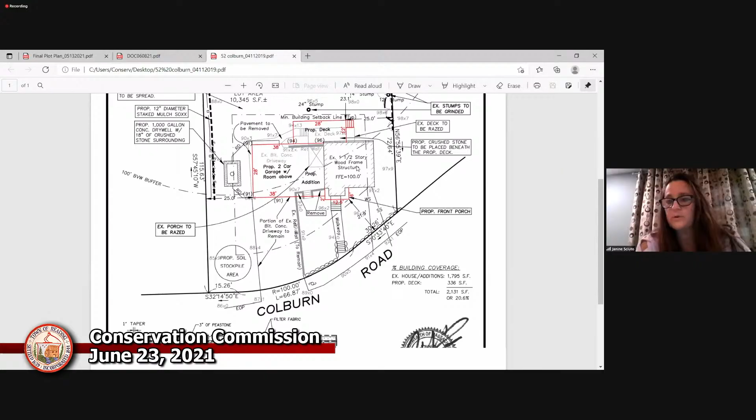So we had a fire damaged area of our home, and currently I think it's 12 by 14, and it has to be replaced because of the damage. So we are trying to just add a little 4 feet extra. It's like 16 by 18 now, and then the adjacent deck is also going a little bit bigger as well. We're just moving it all down a little bit. We put together the plan, which you had, and we discussed it last meeting, I think it was on May 26.

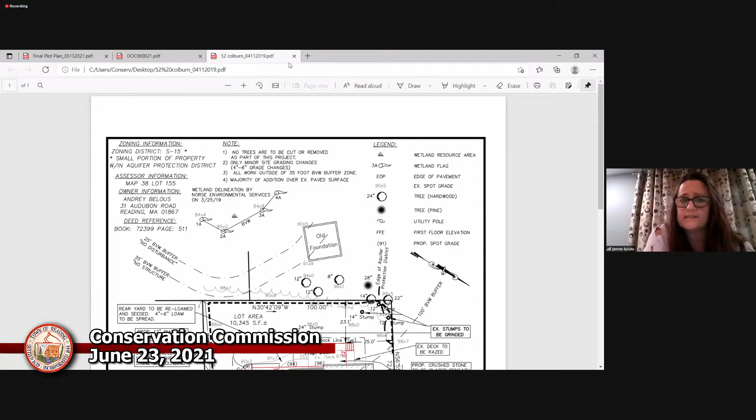And the thing was the question. I had my excavator help me with this, and he's going to put in the drip trench. That was one of the questions, where we were going to put the drip trench. So he helped me, and we were going to do the drip trench along all the areas that would be the runoff. And I still wanted to use my rain barrels, of course. So I put the rain barrels on the side of the house over there.

And there were a couple of other questions about how we were going to access. So I put the access area through our driveway so we wouldn't wreck our lawn. And the soil holding area is far enough away on the other side near the fence, and it's a flat ground area. It's just a soil holding area until we can get the excavator to remove all that soil after they backfill. Okay, thank you.

I'll open up to the commission. Annika, did you have any questions? I do, thank you. So the way I understand the figure, I just want to make sure I understand it. You're proposing a 2 foot wide by 2 foot deep, 1 1/2 inch washed stone drip trench lined with filter fabric in the areas shown in black.

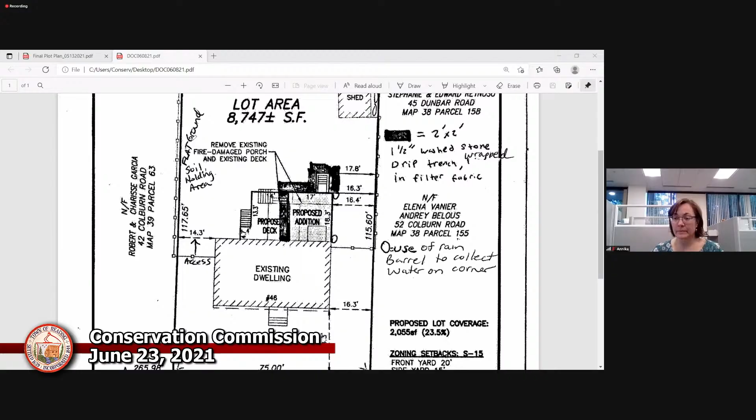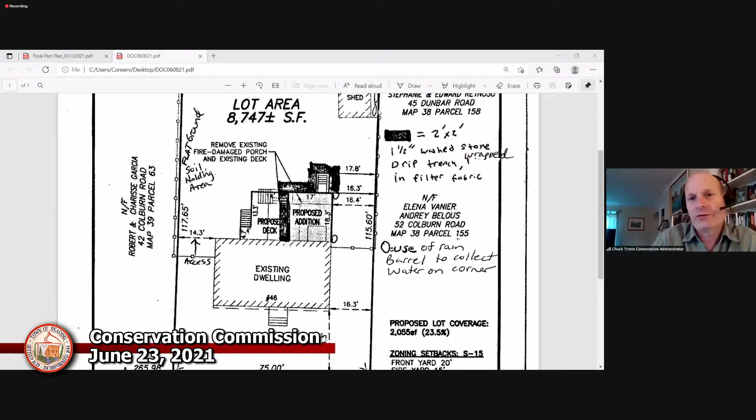A quick question, and I don't know if it's shown there. Where is the resource area? I think it said the nearest corner is 50 feet away from the fence. Is it shown on this plan? I've got the other plan up too. Yes. So the resource area is at the edge of the property line in this corner here. And this is like 70 feet. I think we had the other plan up at the last meeting. It says it's 49 feet to the fence from the proposed addition.

Well, I think that's from the shed to the fence. And then it says wetlands 2 feet plus to 4 feet further beyond the fence. Yeah, that's where the actual forest area starts. But someone said the first tagged tree was like 32 feet out.

Can't get rid of Megan.

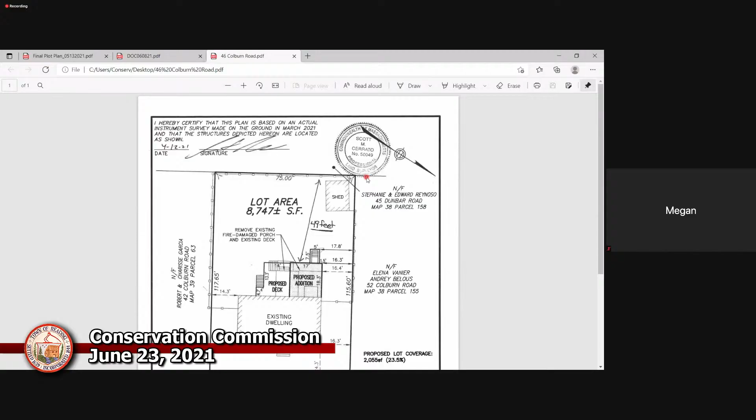Okay. All right. I don't have any other questions. I'm just trying to make sure I had my bearings for where this was. John, do you have any questions? Yes, I have a quick question. If we could go back to those stairs going down from the yard into the basement. There's a flat area at the bottom of the stairs leading into that door. Will there be a drain there? Yeah, there's going to be some crushed stone and some type of drain area, because that was our concern as well. Our builder says there's going to be a little drain area into the crushed stone underneath. Okay.

I think, other than that, Annika covered most of what I was gonna ask. And Martha, do you have anything? I'm just looking at the silt socks around the back corner near the wetland. I think that's probably adequate, but I'm a little worried about the soil holding area and whether maybe there should be silt socks around the pile of soil if it's going to be there any length of time. So that would be my only concern, controlling erosion from the soil holding area.

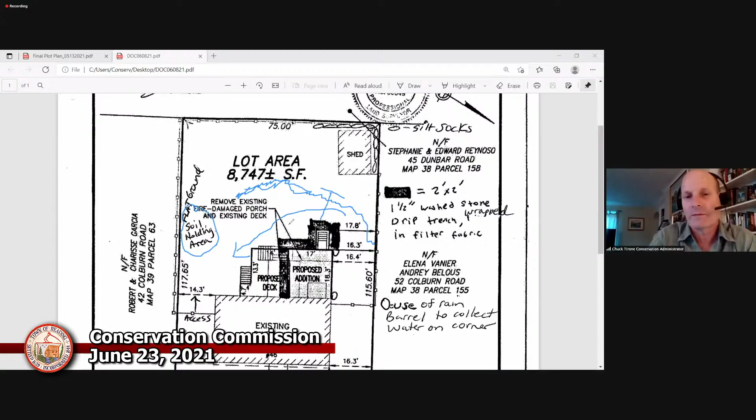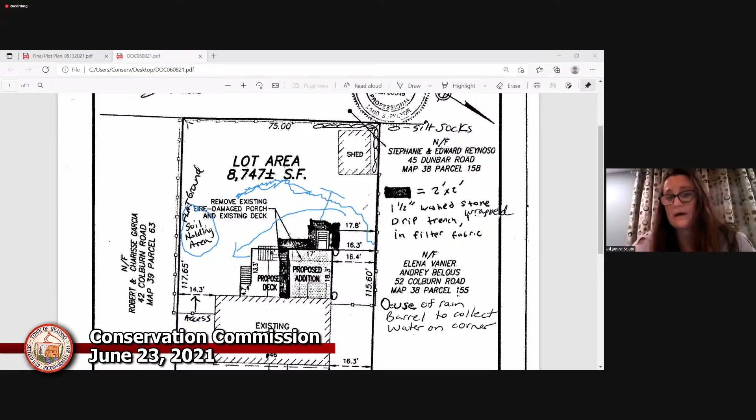The other thing I wanted to ask, someone brought this up before, is about the grading and regrading. Do you have any intention of bringing up the existing grade? Are there any low spots? Does the rainwater collect somewhere that you're trying to eliminate with some of this backfill dirt you're pulling out of the hole? We're going to backfill as much as we need to and probably grade away from the project area. There really aren't many low spots. It's pretty flat ground. But definitely we would grade it down away from the area, like we've done our entire house.

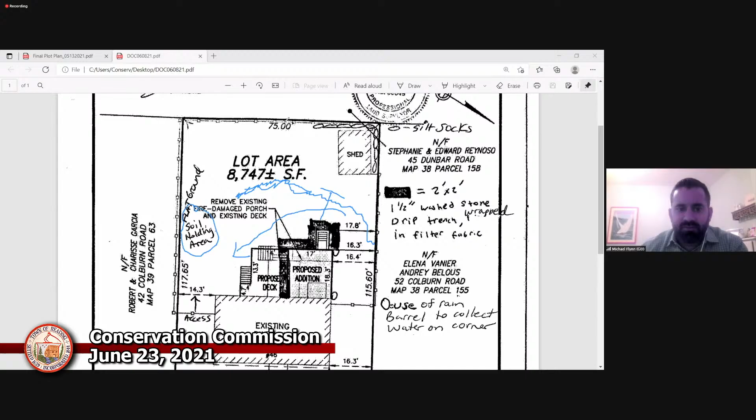Chuck, I'm going to do a little hijack here. Martha had taken a great picture. Yeah, I was just trying to figure out how far back this grading is going to work, and then explain that when you put in the erosion control, it's also the limit of work. So we would need to know where that's going, and you couldn't grade behind it. And you certainly couldn't grade within the 35 or the 25 foot. I think that's going to be somewhere in front of the shed.

So I'll ask for just the email telling me about maintenance and how you're going to wrap the stone, and then draw on the plan where you're going to put the erosion control, and show the erosion control around the stockpile area. But give me a number between the addition and the erosion control so I know how far that is. By number, Chuck, you mean a distance? A distance. How many feet from the house to the erosion control. And then at the office, we can find out if that's within the 35 or 25 foot area.

That's all I have. Okay. If I can just jump in for a second, I just want to comment. What's the reason for this? I mean, this is not pointing fingers at anybody or anything like that. It's just an open question. But what's the reason for this being filed as an RDA as opposed to an NOI? What's the thought? Is it that it's in that outer between 50 and 100 feet?

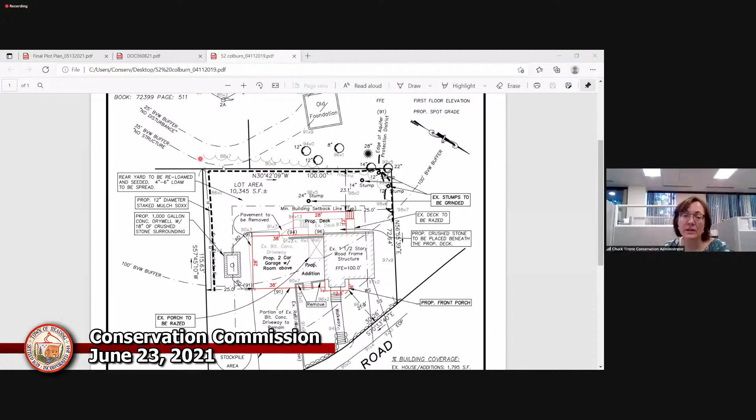On the screen, I hope you can see it, is the neighbors. That corner shows the 35-foot line, and this was professional delineation. So the 49 feet plus the 35 is where we're at with this project. So where it says rear yard, I'll just show you. Right here is the current proponent's corner of their house. And that's the shed in the back there. 35-foot line right here. Okay, so the shed's in that back corner. That's right, the shed's right here. Okay, so I wrote down 49, but it's 49 plus 35. So that's all I wanted to make clear.

May I ask a question? Sorry. Yes, go ahead. So if my land is totally flat and the grading really isn't necessary, what am I exactly grading? Because it's a flat piece of land. So I think that was the question to you, we wanted to make sure that there isn't significant grading going on. Oh, yeah. I'm just gonna reseed. There's really nothing to do because it's flat. Good. Okay. That's what we want to make sure. Oh, okay, thank you.

All right. Are there any other items from the commission? Any comments from the public? You can use the raise your hand feature. We'll unmute you.

Not seeing any. I don't see any either. All right. Do I hear a motion? Make a motion to issue a negative determination for 46 Colburn Road. Do I hear a second? I second. Michael Flynn in favor. Scanlon in favor. Martha Moore in favor. John Sullivan in favor. All right.

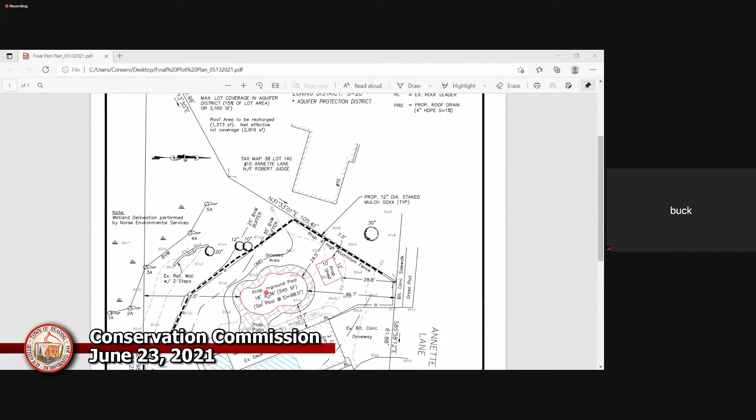Okay, I don't have a problem putting plants back there if that's the issue. There are plants there. I believe the previous owners had taken the trees down and they had to plant these plants in place of those trees, right at the left edge of the retaining wall and to the left. I believe there's 3 of them. But I can plant more. Just let me know what to plant.

I don't think we need a forest, but I think it would be beneficial to the wetlands habitat, now that it's got a little bit of restriction from that fencing and the development. It just makes sense to enhance some of the buffer.

Yeah. I think what I would suggest, Annika, is that if that's the case, then there should be a site visit to make sure we understand that option, because I'm maybe the same way as Chuck. I'm a little confused at what could be put back there. Is there actually room? I've kind of lost my sense of space of what I saw when I drove by there. I agree. I was actually thinking that retaining wall was set back and there wasn't space. I thought the mulch sock was essentially on the limit of lawn.

And it's transitioned to like a dirt vegetated cover beyond that, but maybe I misread that. So I guess what I'm saying is I don't know that there's space to plant. I think it's relatively well vegetated, but if there's a gap that you feel should be filled in to help limit, then I do suggest that we do that with a site visit.

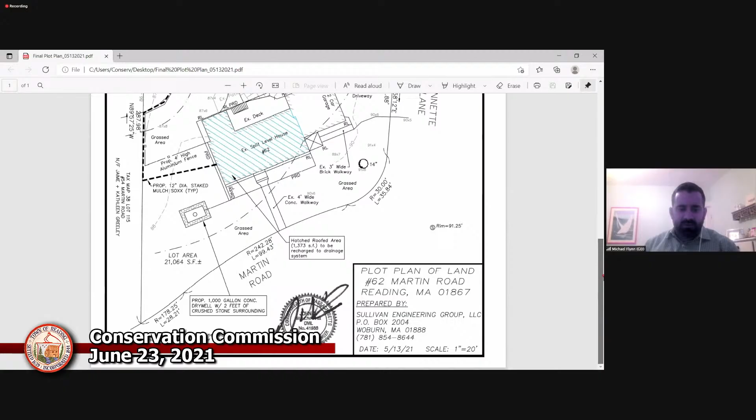Where does it say that, Jack? It's towards the bottom of the plan. Can you go up, Chuck? Yep, right, nope, other way. I saw it. That's okay, I sent you the wrong way. So at the bottom of the plan, I said, note a soil test hole is needed to determine soil type and groundwater table data. Right below the dry well note, if you see proposed 1,000 gallon concrete. I know it's there.

Okay. But you got an elevation 91 over here. Is that, and I'm assuming 88 in this area? Does that dry well work on that corner and you get your 2 feet? I only did that because, and I probably should have showed it, their water and sewer services are coming in front of the house, and we had that 14-inch tree with the root, so I tried to keep it away. But if I had to relocate the dry well, that would be a spot I could look at to gain some elevation.

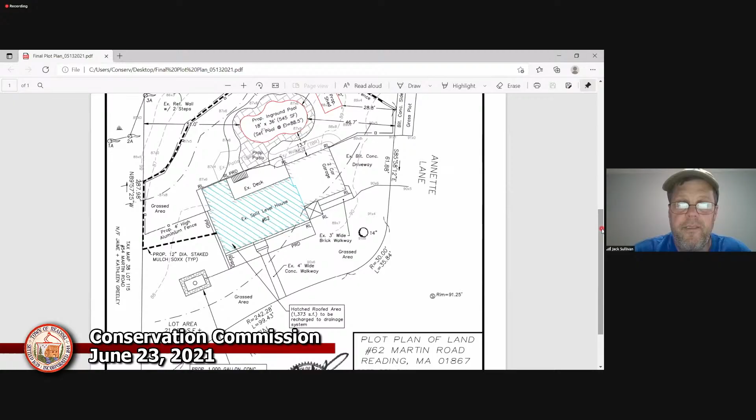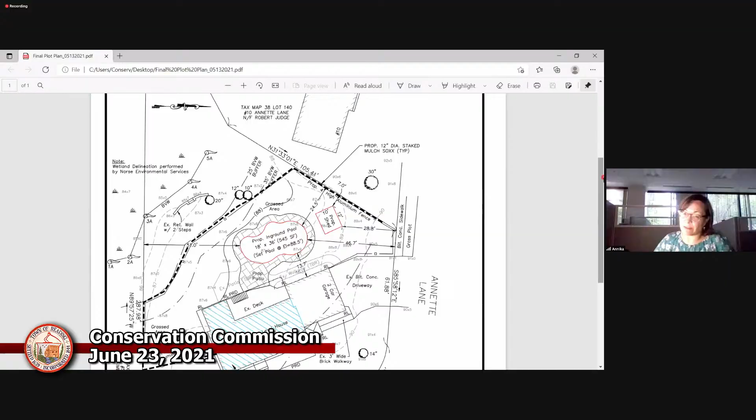Quick question, sort of related. Have you ever had to use the Frimpter method to estimate the high water table? I have. I had a question about that. Doesn't pertain to this. I've had to use it twice, but yeah, call me offline. I can talk with you about it.

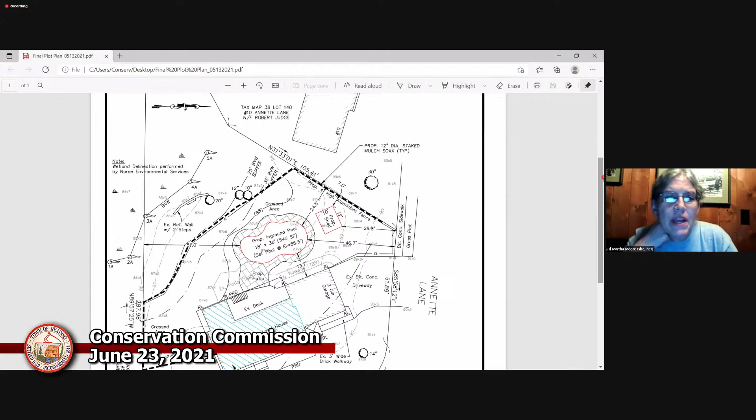Any other questions from the commission? I just have one water table question. You were saying the deep end of the pool is about 6 feet and the water table is like 3 feet below ground level. So you're gonna need to do some dewatering when you're digging that deep end of the pool. And I'm thinking about the instructions to the last homeowner on where to dump the water when they're pumping it out of the hole. Have you got a plan for that?

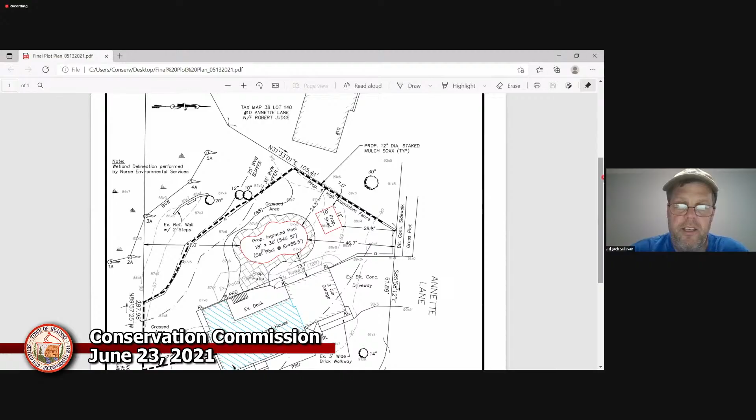That's a good point. We'll have to set up an area off the driveway, probably between the driveway and the shed. And we'll set up some sort of hay bale enclosure where they could pump to that area and then let the water discharge and go over the lawn like you talked about in the previous hearing. So if there was any silt, it would be collected before it went out into the lawn area. And that was all. Okay.

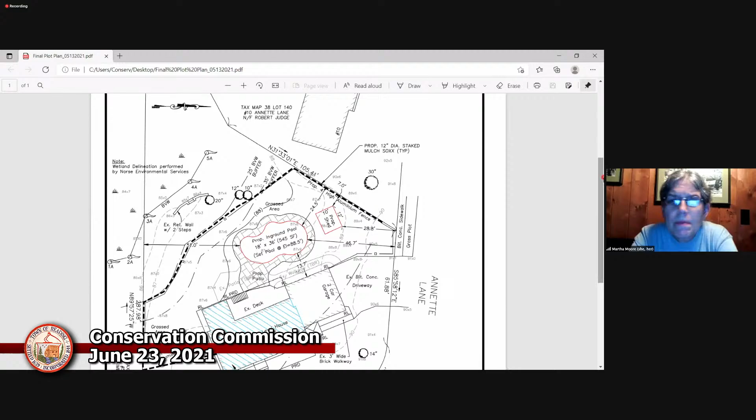Any other items? Any items from the public? Can you use your raise your hand feature? Seeing none. If you feel like you had a comment and you didn't have a chance to get it, you can always email the Conservation Division through the Conservation Division webpage at the Reading Town website.

All right, so let me try to wrap this up of where I think we're at, and you guys can tell me if I'm wrong. So I think, Annika, it sounds like there's some concurrence that if there's some plantings that can be done within the 25-foot zone, it'd be a good idea to create a little bit better buffer since we're putting so much into that zone. The best way to do that would be through a site visit between now and the next meeting. Do we have any other items for Jack to come back and identify on the plans that we think needs to be shown or changed?

No, I would just ask Jack, maybe in the future it would be beneficial to the commission to understand where things are located. If that edge of tree, I'm going to call it the tree row, is located on the plan. Yeah. I think that would have been, and I know that it says grass in one spot, but then it doesn't say anything below the erosion control line. Yeah, it's just tough to delineate where that transition happens.

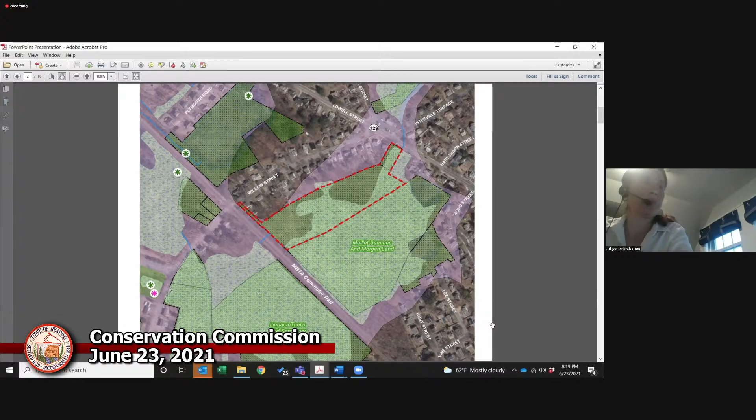The existing use is a conservation land with informal and formal pathways, permeable pathways, and a boardwalk that was, I believe, installed in 2019 or thereabouts over the existing bordering vegetated wetland. I'll note here that the wetland that's shown here is the GIS wetland, and we'll show on the plans coming up here where the delineated wetland is.

Just to give you a sense of our design approach or our goals for this project, as was mentioned in the intro, we are working with the Mystic River Watershed Association, the town of Reading, and other towns in the upper Mystic watershed to address some of the broader regional flooding and water quality issues in the upper Mystic and the Aberjona. And we are also looking to provide connectivity to larger open spaces.

So the goals of this project include managing stormwater to improve water quality and address flooding, restoring the existing landscape with native trees and plantings, enhancing the pathways that exist on this space, and allowing residents that are adjacent neighbors and other members of the town of Reading to enjoy the wetlands and the trees and habitat. And also to incorporate site amenities that will allow more people to connect to this open space, including some parking, improved entrances, signage, and seating.

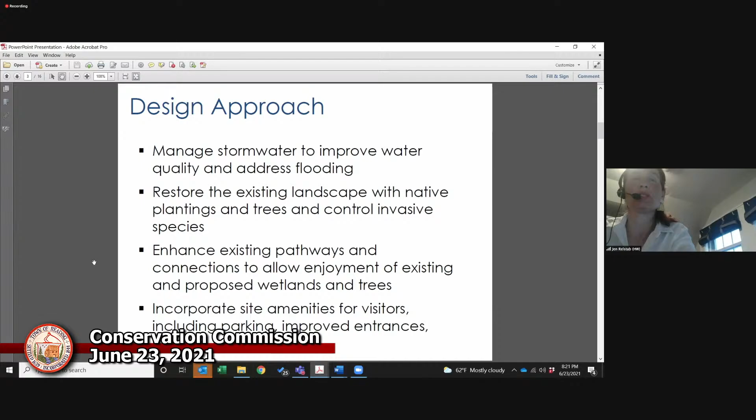The design elements that I'll talk about today are the stormwater management, the restoration opportunities, and the open space amenities. And these pictures on the right-hand side here just highlight some of the images of what we're trying to achieve at this space.

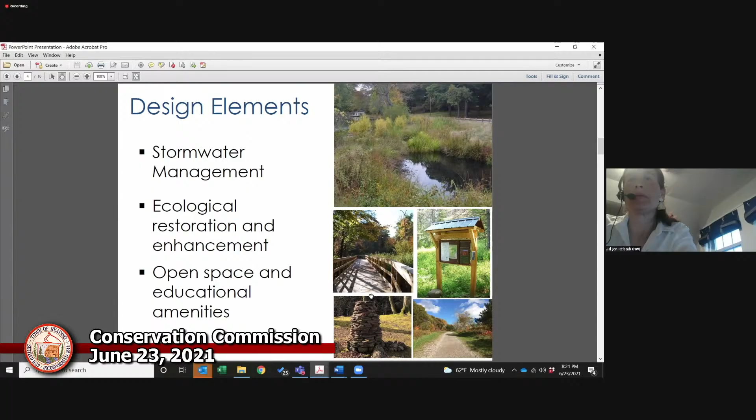So the stormwater improvements here: the existing stormwater that comes from Willow Street and Lowell Street, about 40 acres' worth, currently runs through drainage pipes directly into this culvert that is located on Lowell Street. And we're proposing to divert a portion of that stormwater into the Mallet Conservation Land. That would be treated first through a series of sediment forebays that provide pre-treatment, and then through a series of wetland pools. That's here in this image, these light green and blue areas.

These wetland pools provide varied topography and varied vegetation to provide not only filtration of the water, but also habitat for wildlife. In this particular design, because of the existing resource area on site, to connect our vegetated wetland cells we are piping underneath the existing bordering vegetated wetland in the area of the existing boardwalk to minimize the disturbance to that area.

Stormwater, as it continues to flow through these various pools, then goes back out to the Aberjona. And in this image, just for reference, the Aberjona is this light blue line that goes through and underneath the railroad. We also have some treatment of the parking and access lane that is on Willow Street, and I'll talk a little bit about that in the next slide.

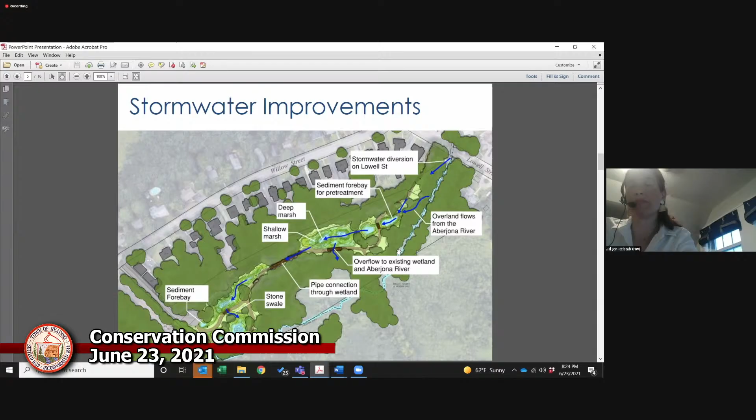Oh, and I should also mention that we are proposing a very small channel that will allow very large storms, so greater than 50-year storms, to flood into this space in conditions where it would normally flood over bank. We do not believe that this particular design would inhibit any of the current flows or uses of the Aberjona by wildlife or others as it is now.

The open space improvements, I'll sort of move left to right in this figure. We are improving the existing vehicular access to the space from Willow Street by widening slightly the existing path to allow for vehicles to come into the space and pass if needed. There's a little bit of a turnaround at the bottom and 4 parking spaces here.

We'd have an informal entrance and kiosks that would have both educational and wayfinding features with potential what we're calling rock cairn sort of entryway signs and elements. This path that you're seeing in sort of the light brown is a permeable pathway consisting of a stabilized stone dust that would have boardwalks crossing over areas where the water would be flowing out and into the existing wetland or the Aberjona.

And there's other features here too, including overlooks and on this side, stepping stones to allow people to interact with the constructed wetland. We have proposed benches, formal benches, and then also seating walls in certain locations to allow people to have passive recreation and view birds and sort of experience the wetland.

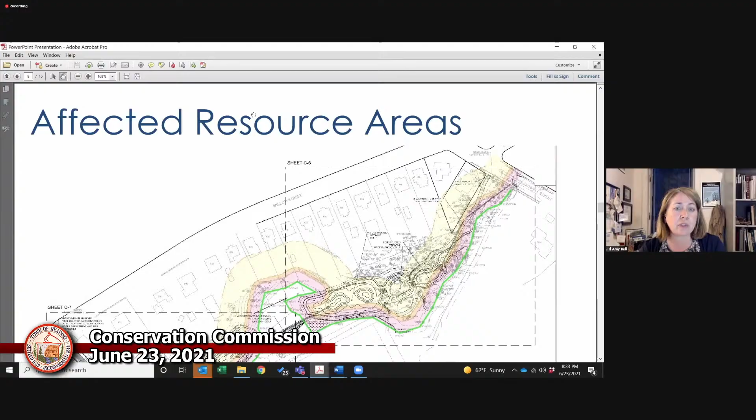So the proposal is to remove, restore and replant the area within the existing footprint of the walkway, and then to also provide some wetland replication for the additional alterations. The replication area is a total of about 1,500 square feet, and it's being designed to match the Massachusetts inland wetland replication guidelines. With that, I'm going to turn it back over to the commission for questions and discussion. Thank you.

Thank you, Jen and Amy. I'll turn it over to the commission for some questions. Before we talk about the specifics of the project, I had a couple of more administrative questions. This project is filed by the town of Reading. I think you had come before us in general to give us some feedback. Which watershed is it that's involved? It's the Mystic River watershed. Mystic, yeah. So what's the role that each group plays in this? This would be a town project, is that correct?

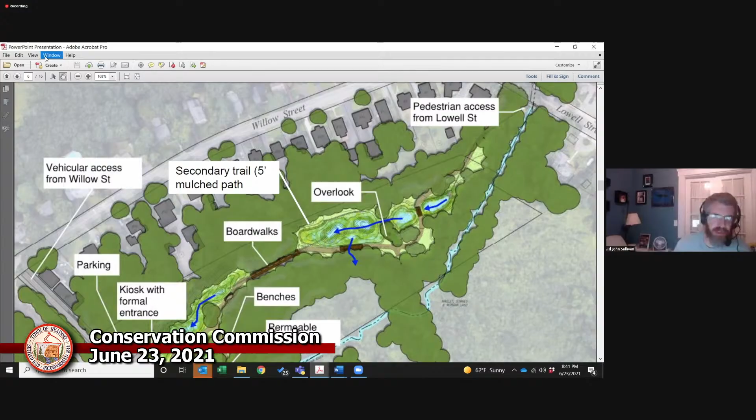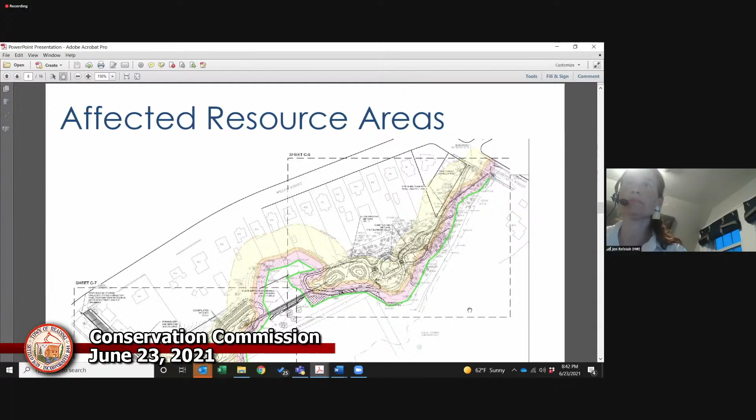Is that just because it's not on these maps because it's not where the work is being done? We didn't, yeah. So the original survey did not collect it, and we collected it when we were on site doing our field assessment. So it's not surveyed, it's just sort of identified, so to speak. But we have a call out there to connect to the existing path. Yeah.

Any other items, John? That's it for now. Okay. Martha? I have 2 questions. One is about the replacement trees.

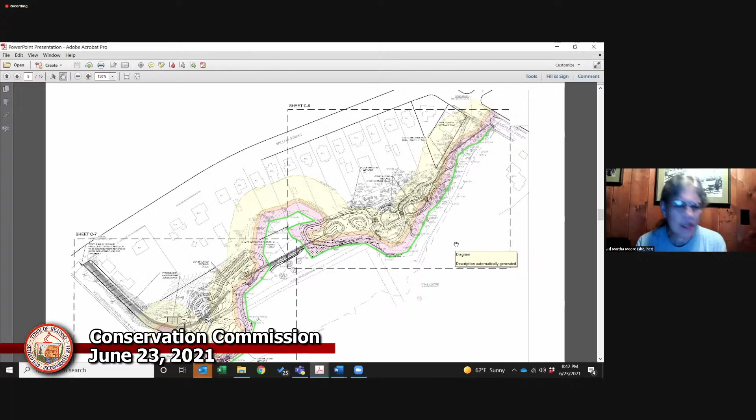I believe our tree policy calls for replacing trees with trees that are something like 2.5-inch caliper trees, and your 31 shade trees are listed as being 1 to 1.5-inch caliper. So I'm wondering whether that can be adjusted to match our tree policy size.

So I did check with our landscape architects about that. They can't really tell us when it comes to an 8 to 10 foot tree, which is what we have there, exactly what the caliper is. And they did say that planting slightly smaller trees may be more successful in the long run.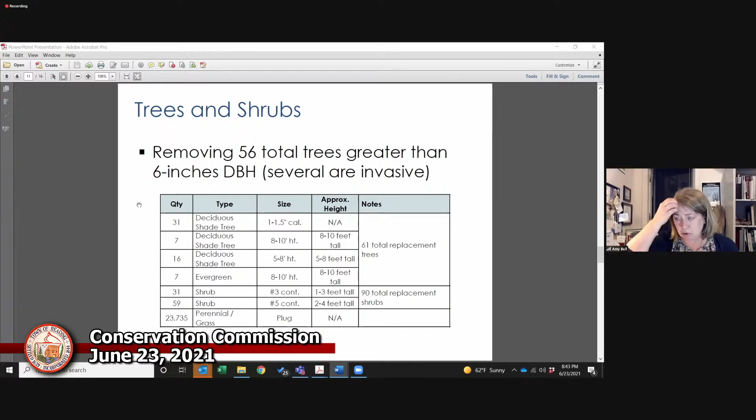And as I said, there isn't really a 1-to-1 or 2-to-1, 3-to-1 matchup perfectly with your tree policy. But we were trying to do the best we can with the site conditions and the goals of the project, being to ultimately manage the flooding and the stormwater that's in there. We can look at it and see what's available.

Okay. Yeah, I have no objections to the numbers that you're bringing in, because 2 shrubs equals a tree in the tree policy. So numbers, you're fine, but it might be that in a wooded area like this, you're better off with more small trees rather than, you know, in somebody's yard, they're putting in the 2.5-inch caliper trees. I just wanted to bring that up.

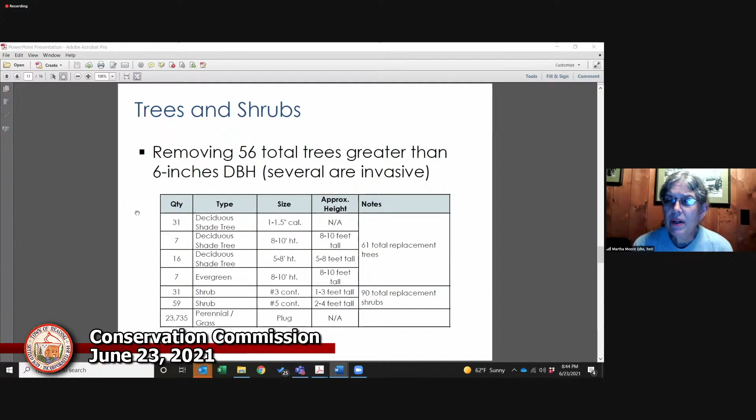No, I appreciate that. And then my other question, when I was reading the packet, you described the boardwalk that you were going to put in with wooden planks on the top. And I know a lot of the Eagle projects that have come before us have been using composite planks rather than wooden planks, and they're replacing the rotten wooden planks from previous iterations of boardwalks. So can you talk about why you chose wood versus composite for the boardwalks?

Yeah, so I think in the detail it's pressure treated wood, and I don't even think we specified what wood, but a lot of our projects we are trying to use hardwoods that would be sufficient for a natural condition. In a couple of our other projects in other communities, and this is part of a broader goal as well, we've been looking at using local wood sources, using black locust as an example.

That can be expensive, but it is a very hardy wood. And we'll have lots of it here. I was going to say, we do have lots of it here. If we could just meet up with a miller. Yeah, if you know a miller, that will be great.

But that tends to be our preference instead of composite, mostly for, first of all, the natural look and aesthetic of it, but also the long-term climate impacts of using a natural, native-ish hardwood. But if there's a particular interest in changing that material, we could have that conversation as well. Those were my only questions.

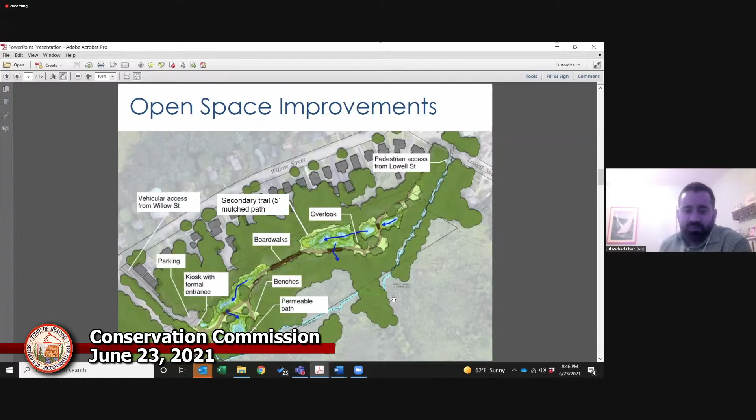Okay, thanks, Martha. All right, I'll start with the trees as well. I think you had some great plans showing the proposed plantings. Yeah, here we go, Chuck. So 56 trees is a lot. So I guess I'll take a step back.

I didn't go out to see the site. I know this area very well; we've been out there for other projects. But I think it would be good to get a site visit with the commission. What I don't have a great feel for is where exactly all these things go in space. It would be nice to just walk the site and understand where this is exactly proposed, so we've got a better feel for what is going where.

I know you guys are running out of time on your contract, so I think we have to schedule that sooner rather than later. I think we've proposed a few days, and we're going to be figuring that out as part of a later part of our agenda. But I would like to understand where this is in space and what's out there. Have the trees that are going to come down been marked at all?

No. Are they marked and X'd on these plans? Yes, if you go to the existing site demo or ESC sheet, which I think is the fourth sheet in the set, they're marked with an X.

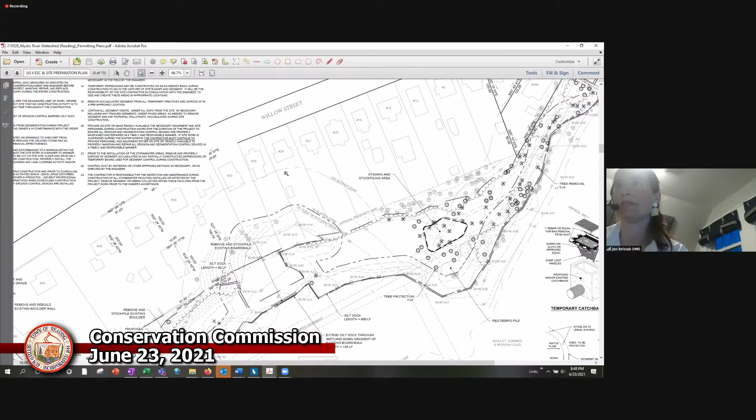I will pull that up if you want. Yeah, I will note, just as a caveat, and I can stop sharing so Amy can show that, but I think those don't have the species and size on them. I think that's true. One of the issues that we ran into, there was another surveyor who conducted the survey, and I think some of what we were seeing with the survey was slightly inconsistent with what we were seeing from our habitat and tree assessment. So that's why they're not shown on there. But as we walk the site, we can kind of walk through that with you.

Okay. Very good. And I mean, this is a big area, so 56 spreads out quite a bit. From a community standpoint and the neighboring houses, I am interested to understand where those are being pulled down and the relative replacements that are going back. The trees that we put back will hopefully eventually grow into something similar to what it looks like today. But I do in general have concerns about taking out so many and having this feel open, and the neighborhood along Willow Street feeling like all of a sudden everything's clear cut back there and they're just looking back into this.

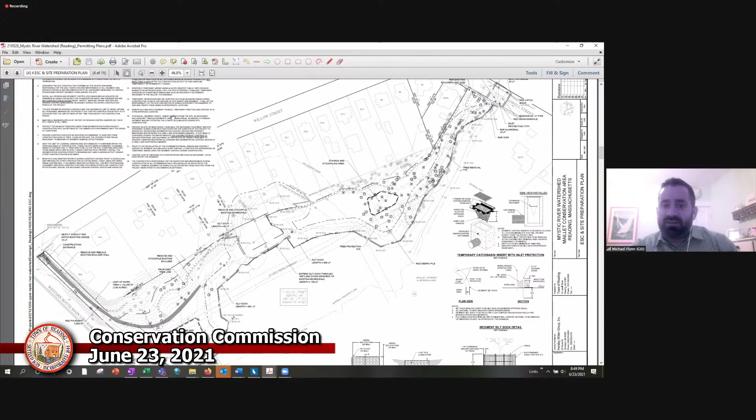I think I saw with your replanting, there was a lot on the line between, essentially. Jen, I'll stop sharing. You can go back to that plan. Okay. There were a lot of proposed plantings in that line between the homes and where the treatment is proposed to take place, which I like. Usually we try to push it closer to the wetlands and create that buffer, but this project is different from most of what we're seeing and is getting incorporated into the habitat.

So I like the idea of having that buffer exist, I guess I'll call it west of where a lot of our resources are, to enclose the space, make the community feel like they're not walking right in back of the neighborhoods, and the homes back there not feel like we've just clear cut everything and they're opened up and looking at it. I think that's an important feel to any sort of replacement plan. That's part of my goals when we look at what trees are being taken down. How does that look and where are the replacements relative to that?

I'll speak to two items and then Amy, you can feel free to talk as well. The majority of the trees being taken down are on Amy's plan, but we won't switch back. We have that connection from Lowell Street coming through, and that pipe that is going to come through and connect to the sediment forebay, and also the improvements we're making to the existing footpath that connects to Lowell Street. The majority of the trees being taken down are on the interior, sort of the middle of the space here on the east side.

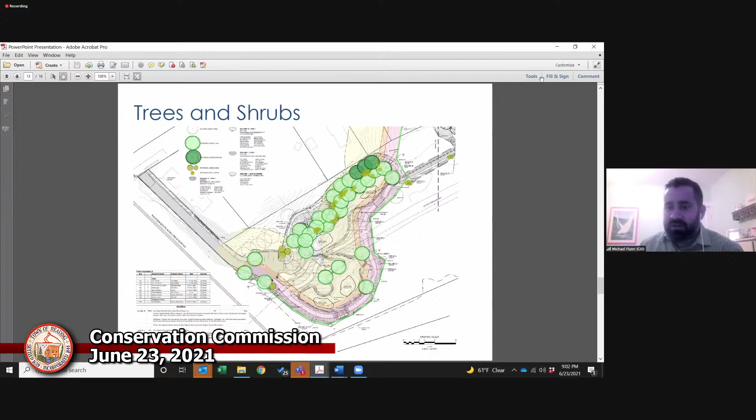Hi, I'm just going to jump in. Yeah, go ahead.

Just looking at the plans and listening to this discussion, I just wanted to mention the area where the 100-foot buffer meets that road, that access road. I'm hoping to see that a little bit more clearly, and what trees are also in that area that might be coming out. So that's one thing that just sort of popped up during the discussion tonight.

The second thing that came up for me was appreciating the restricted access, even if you are expanding the width of that entrance road. One thought or idea I had was, is there any opportunity next to that access road to have like a crushed stone path as well, to increase walkability from the street next to the road?

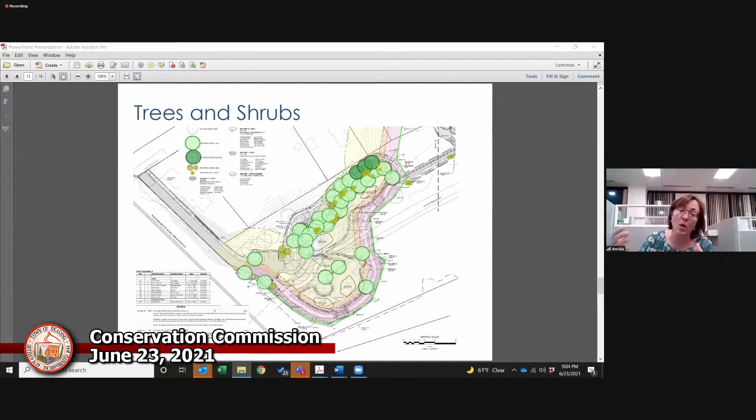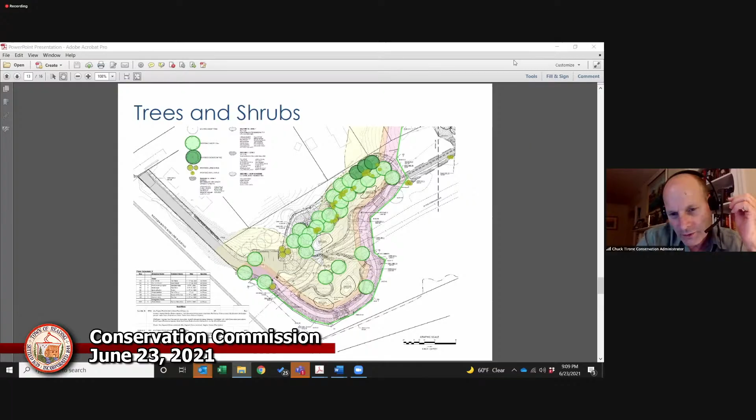Well, just had a, sorry, some of the changes to the plans. One of the ones I was thinking about was some sort of lookout area. I think I mentioned it in one of our meetings. So if there are some additions to the plans, is there an opportunity to change these moving forward if there were some changes in the path or some additions that we'd want to do?

I guess that could also be something that the town takes on outside of what's here. It's just that you're going to walk this path around the outside that's kind of along the Aberjona River, and there's one point where you could really take a good look, looking towards the depot with the train tracks on your right-hand side, and look at the Thalen Bird Sanctuary in that area. And I thought that was an interesting area just to drop a few large stones in, of course not in the water, but just for a lookout area.

Yeah, I mean, we'd be happy. I think it would be good, to Michael's point about a site walk, to point those out too and have that discussion. We obviously have, for this particular cycle, about a week left. So it's a limited time for us, but we'd be happy to look at that on site.

It almost seems inconceivable that you would find a couple of boulders with this project. But no, we actually were removing, well, I think there's like 5 or 6 that were to come out because of the grading back in this spot here. There's a few that are kind of sticking out here that we need to remove because of the grading up in this space. So we will have some boulders conveniently.

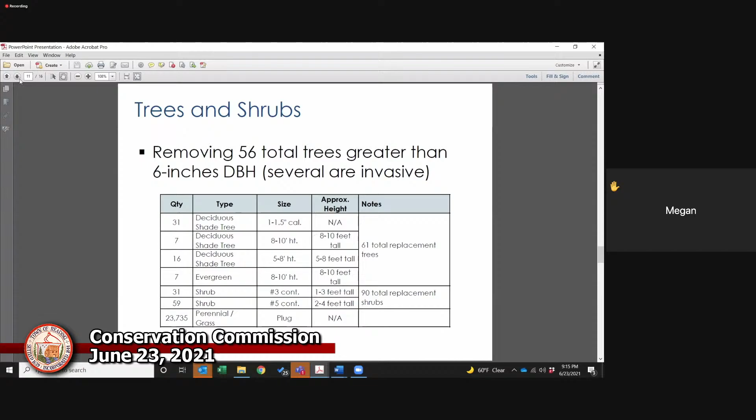And also commenting on the road coming in, many times that I've driven down there with boardwalk materials, even after much of it was done, I never encountered anyone walking on that road. I never encountered a car coming down. So I don't see needing that extra space as an issue. I think people can walk on the roadway safely.

They started using it after you built the boardwalk, Will. You created that space. Yeah, right.

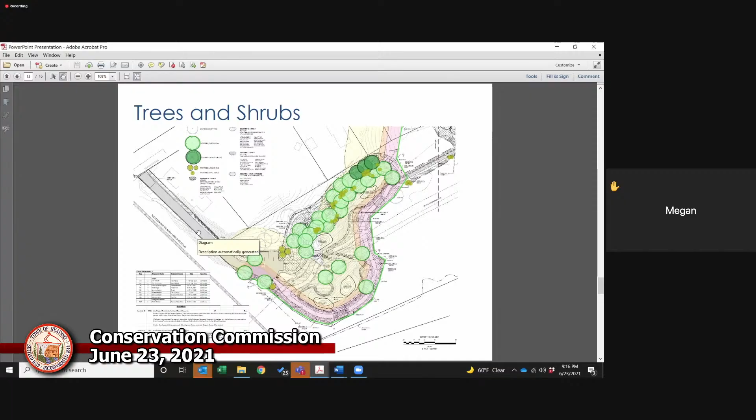So those are all my comments for now. Thank you. Anyways, this is Will Finch. I live at 51 Mill Street in Reading. Thank you, Will. Good comments.

I guess the one that I am interested in hearing is, do you have any thoughts on the invasives? Well, actually both that I thought were really good points. I'd like to hear a little bit more of the invasives and the 8-foot wide paths. I actually don't think I caught on the 8-foot wide. So tackle the invasives if you get the path, okay, Jen?

Yep. So the invasives, we're all pretty familiar with. Japanese knotweed, unfortunately, and the approach that we've got is not completely fleshed out, but it is a combination of mechanical and herbicide application. A good portion of that is occupying that field. When we first did our site visits, I didn't think anything of it, except there were sort of these strange, mounded, oddly textured areas in the field. And then we were back a couple of weeks later, and you realize the whole field is filled with it.

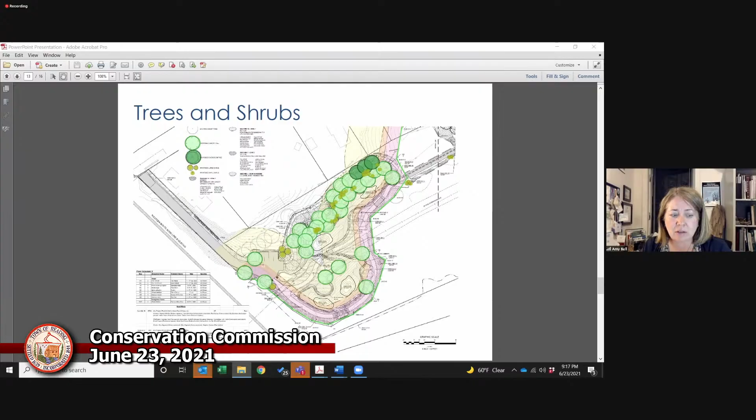And that's one of the areas where we're going to be doing quite a bit of excavating for the deep pools and for the constructed wetland. So some of that excavation will occur. But I think what we found in our experience is that the combination of both mechanical removal and the herbicide application is necessary to really beat this back, so that mechanical in the long run can be done with some regular diligence, I suppose, catching them early.

The path, yeah. So we actually had it a little bit wider than 8 feet. In one of the earlier concepts, we had talked with Alex and Chuck and others, and one of the uses that we were hearing that the town would like to have is the ability to have both pedestrians, and that includes walkers and strollers, but also people with bikes, so regular bikes but also mountain bikes, be able to use the space. And so multi-use paths actually require a 10-foot wide path, so 5 feet for each direction, with clearance in the shoulders.

We tightened that up a little bit, acknowledging that the existing paths that are out there are about 5 feet, and there are several informal paths that are even smaller than that. And the intent of this space is obviously first and foremost a conservation area. And so we are trying to manage that to the extent possible by limiting that. However, we do acknowledge two things. One is that more people will likely use the space once it is improved, as was just mentioned. Once you build it, they will come sort of situation.

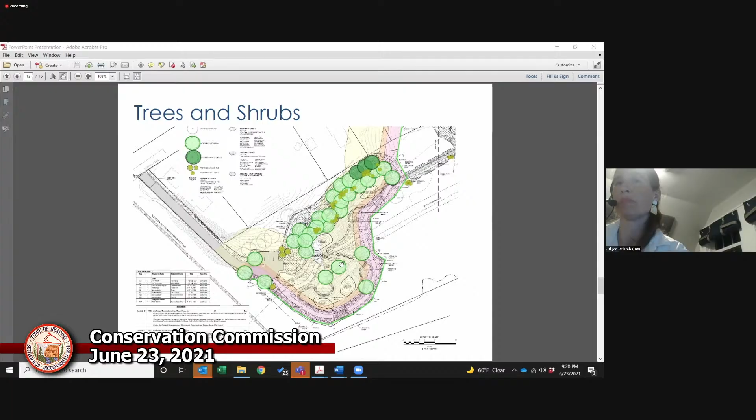And as Amy mentioned, and actually we're not showing it, but this is the BVW, there are multiple footpaths through that space. So trying to keep people on that main path is part of the reason also for that 8-foot wide.

Thank you. It was also brought up, Mike and Will, that one of the things that we wanted to have with this project is just enough space for someone to stop walking and take in what's happening in the landscape, and to have enough room to have people walking past and biking, and someone just to sit there and say, here's a bridge, and I can look over and view the pond, or there's a bird over there, me and my kids can just sit there for a minute and not be in someone's way. So there were a lot of things we thought about with this path.

And 10-foot DCR paths are pretty big. This is in that same area, but I think it's going to be needed, and I think it's going to work real well for what we're doing.

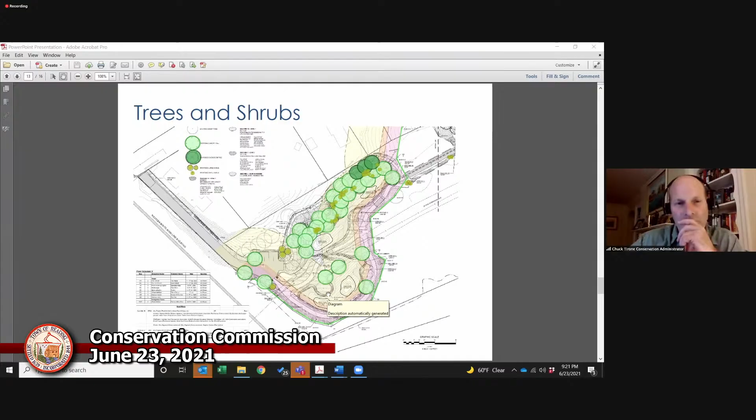Okay. Any other comments from the public?

Seeing none. If you feel like you didn't have a chance to provide public comment, you can always. Let me bring up 2 comments. Sure. So I got a call this afternoon from someone that lives on Intervale Terrace, and they were concerned about 2 things. I guess there's a concern about vermin, like rats, as part of this project, and wanted to hear thoughts

on that. And the other was on Lowell Street, near Intervale Terrace, there's a culvert that is going to actually be the access point to all the water that we're trying to use for this project. And their observation was, well, that's not an equalized culvert, and that there's some ponding under it and in front of it on the opposite side of the Maillet property. So if that could be discussed just a little bit, that would be great.

Yeah, so we know that AECOM has been working on a couple of studies for the town that has been looking at the culvert sizing and implications of those culverts and sizes on the flooding in the area, upstream and downstream of our site, from the high school down past Austin Prep. We acknowledge, I think, that there needs to be in the next phase.

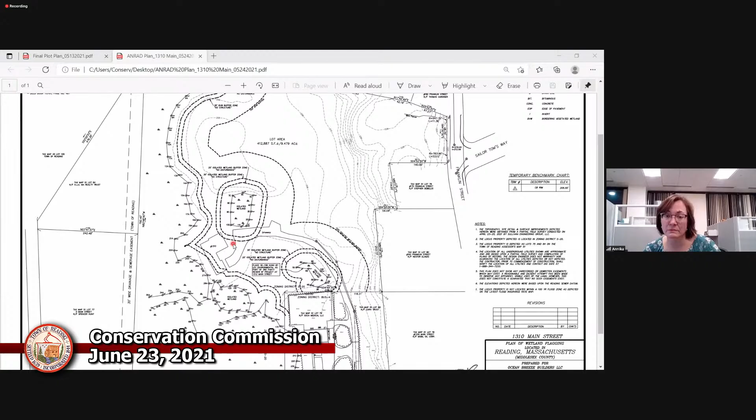Yep. But at least my recommendation would be, the first step would still be, let's meet out there with Norse and walk, and they can justify why they picked the locations that they did, and if there's still questions, we can take it from there at the next meeting. That would be my suggestion.

John, did you have any questions? No, I think I'm good. Okay. Jack, I know that makes this pretty quick, but does that make sense? I got a question. Okay, go ahead, Chuck. Sorry. Sure. Hey, Jack, this is Chuck.

Chapter 61 land. Can you tell me about that process and where we are in that process? So Chapter 61 land, the town has first right of refusal on property, and that's specifically my question. Where are we with this first right of refusal? So what I heard from the owner is the town decided not to exercise their option on this piece of property. And that's when the developer came in and they have an agreement now in place, like a purchase and sale. And we're exploring developing the property.

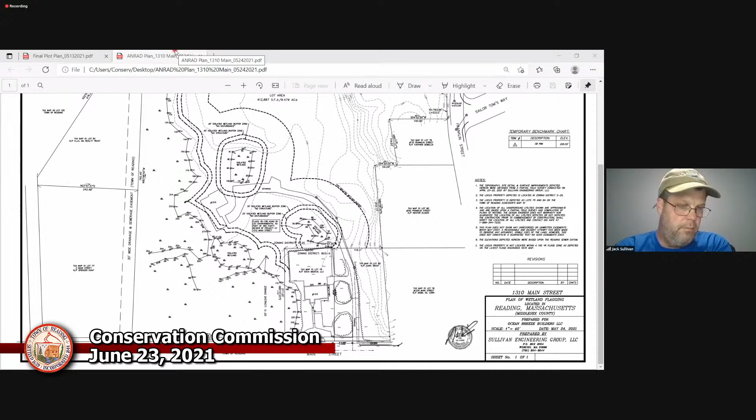I'll do the same thing here. Do we want to, well, I think we've got a couple to schedule. Jack, I think that there's others that we want to schedule. So I'm going to save that for a little bit later on in the meeting, but we'll have Chuck reach out to you if we figure out a date, if that's okay. Yep, that's fine. Okay. All right.

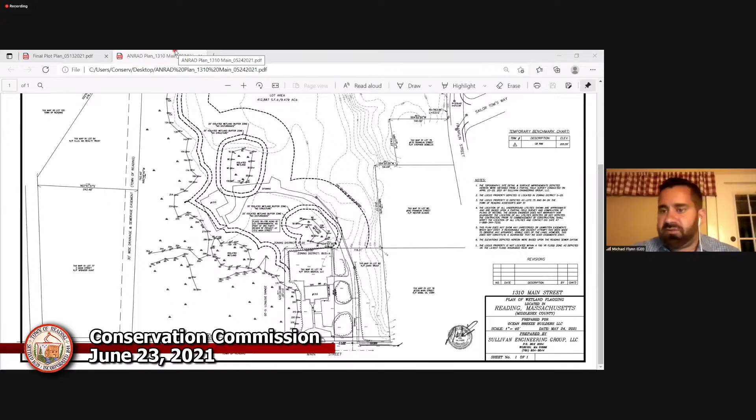Are there questions from the public? I see a hand raised. If you could just announce your first and last name and address when you address the commission.

Hello, can you hear me? Yes. Yeah. Sorry. It's as if I've never done this before. I can't seem to do my video, so you're going to have to look at my poor attempt at least putting my face on that profile pic instead of my children this time.

Some of you have touched on what my concerns are on this project, but I think I'm going to put it a little bit more bluntly. I do feel that there's an inappropriate bleed between two projects in front of the town. And I'm really hoping that the Conservation Commission can hold the line and make sure all the T's are crossed and the I's are dotted.

The previous project for the veterinary clinic is slated as 1310-1312. And I brought this up last year as a concern of mine because 1310, for the paperwork to be completed properly for the Conservation Commission, would be a whole different set of paperwork than what 1312 filled out for the veterinary clinic buildings. But they said that it was a typo and they were working on getting that changed, that 1310 did not belong on the veterinary clinic building.